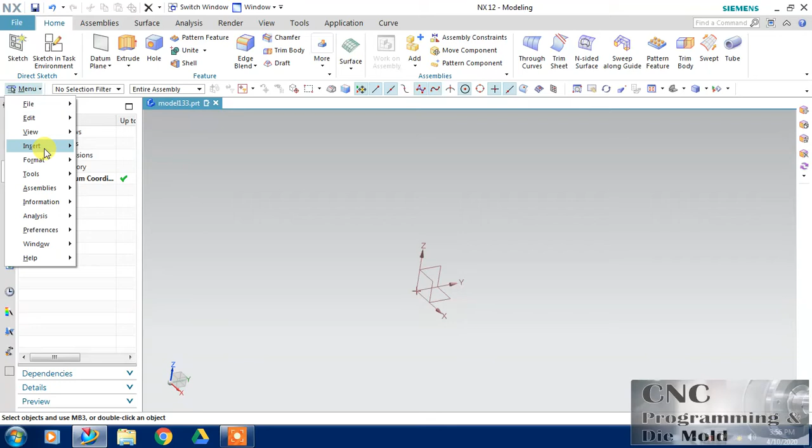This blend corner. It will blend three or more corners into a single corner.

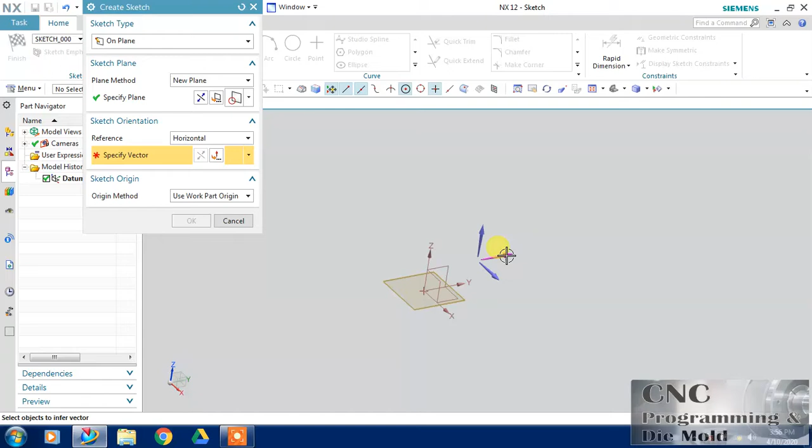So to create this, first I have to draw a rectangle and I need to extrude this. This is my rectangle, and I am going to extrude this and just apply some draft so that it looks a little better. Add new set and again angle.

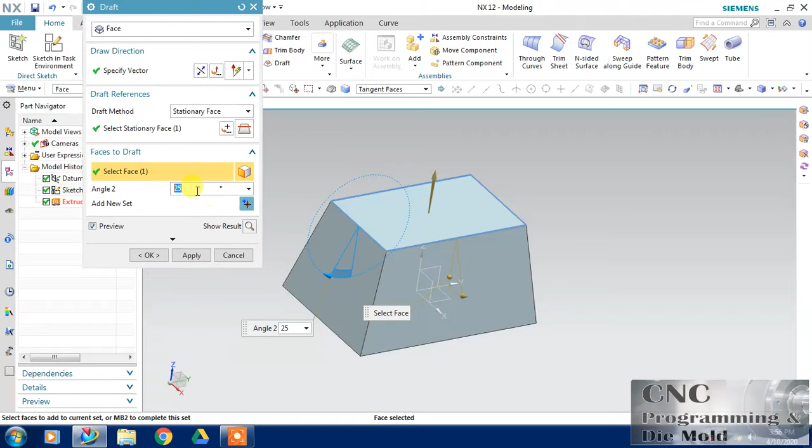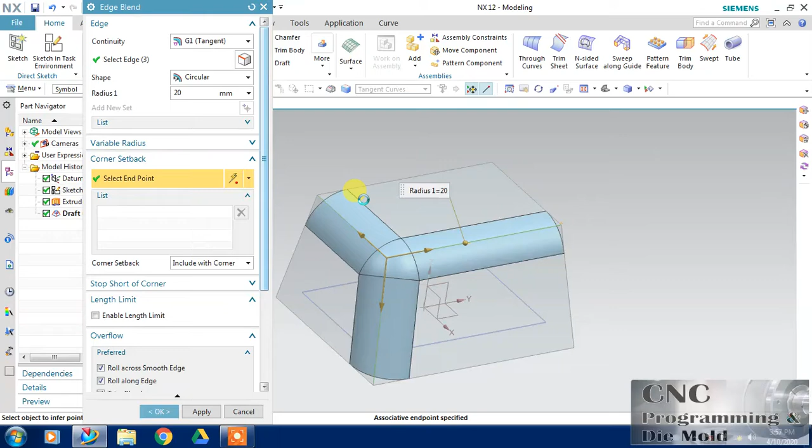Click OK. Now I want to create a corner setback. Just click and apply the radius and corner setback. This edge blend we have already discussed, so this time I am not discussing this.

Click OK. Now I have some faces here, and these are split into some small faces. Now I want to join all these faces into a single face, so I will use this blend corner.

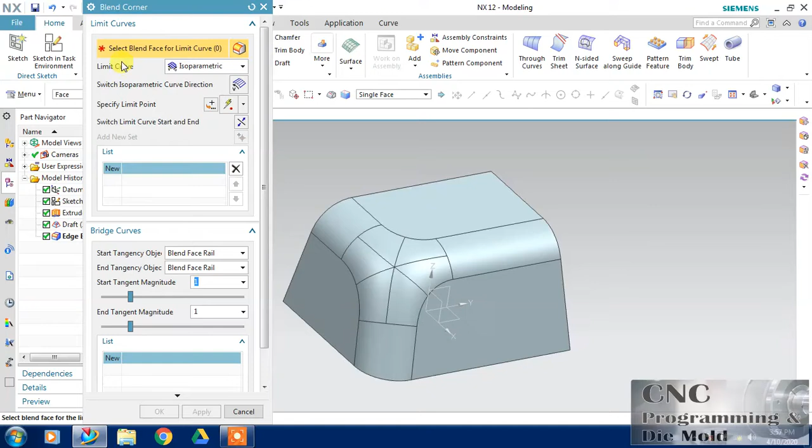In blend corner, first select the limiting curve. This is my first limiting curve, second, third, and add new set, second.

This is my second face, and again add new set, and you can see the warning is coming: cannot construct blend surface.

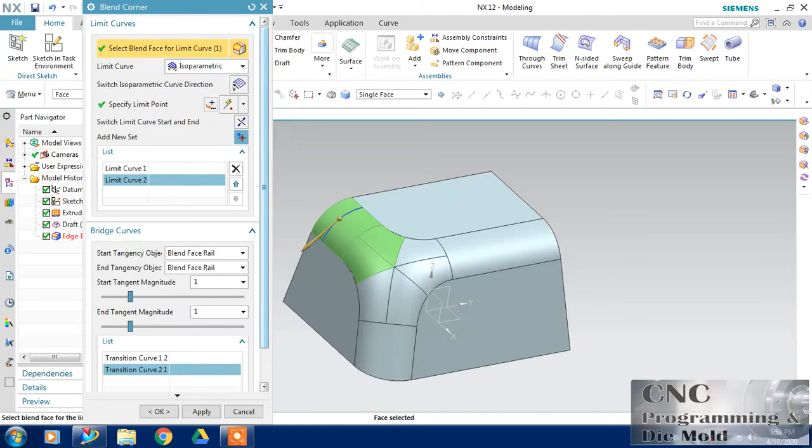Okay, just redefine this. I'm going to add two more faces in this third one, and in the same way in the second limit curve I'm adding these two surfaces. So all the surfaces are selected, only one problem is there: the curves are not matching properly.

So first come to the third limiting curve and reverse the direction, then click on the second curve and reverse the direction, and limiting curve 1 and change the direction. Now you can see these curves are matching properly, and click OK.

And the result will look like this. So the result will look like this, and this command is used for merging corner faces.

And now you can change this color and add a specific color. Just one click and apply.